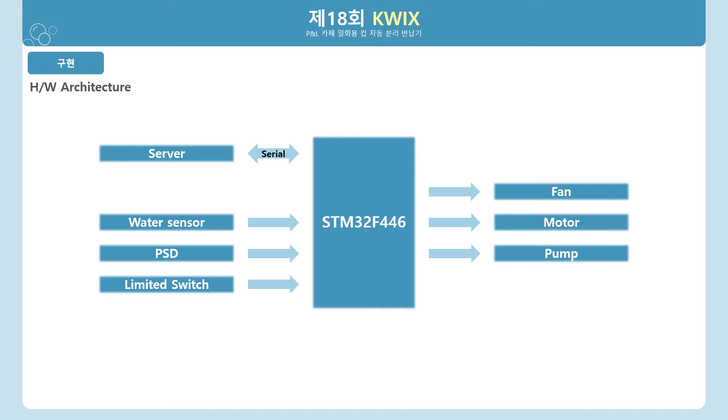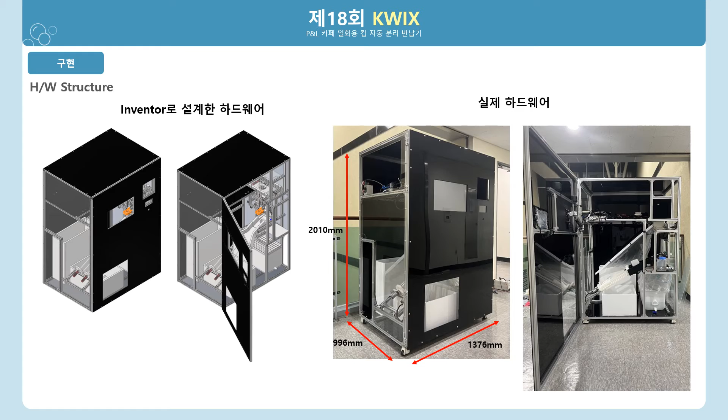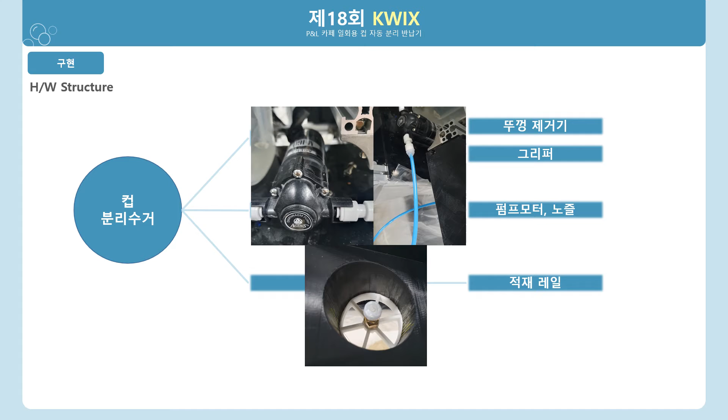These are images designed with Inventor tool and pictures of our work. In order to carry out the proper separate collection, first of all, the cup and cup lid are separated using a cup lid remover and gripper made with a 3D printer. Second, the cup is washed through the pump motor and nozzle made by ourselves. Then we made a mechanism for loading and storing cups by making a sorting rail and loading rail.

Our machine takes 24 seconds to separate and collect one cup, and the total weight of the machine is 150 kilograms, and it can load and store about 600 cups. Available cup size ranges from 10 to 20 ounces for paper cups and 12 to 24 ounces for plastic cups, and available straw lengths are up to 210 millimeters.

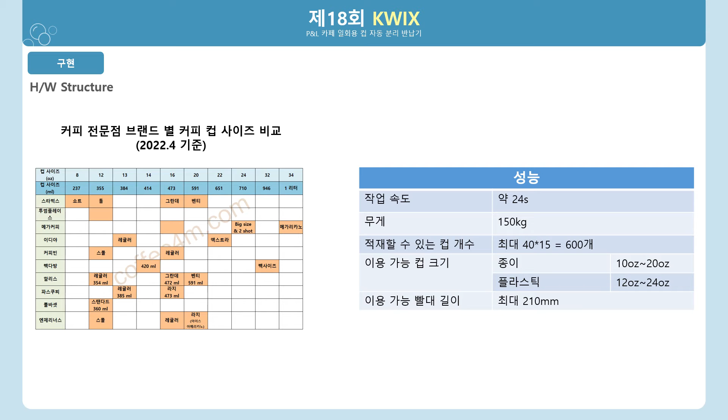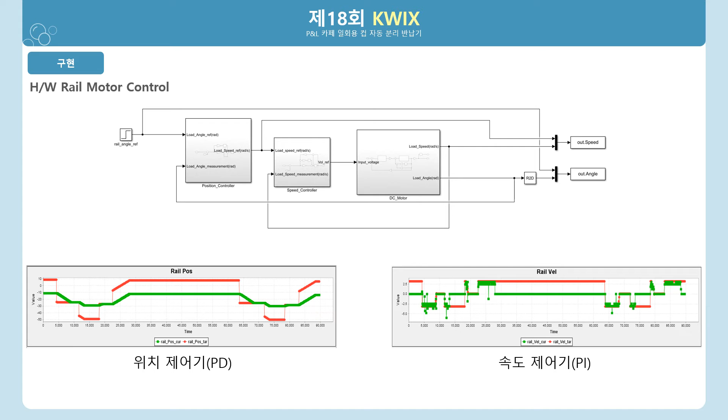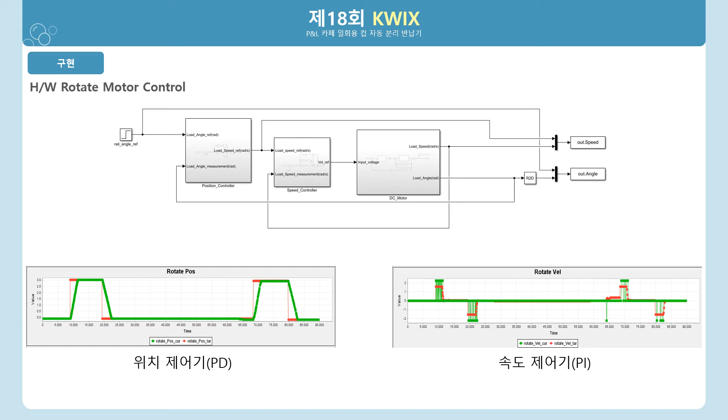We use a position controller using PD control and a speed controller using PI control to control the rail motor that moves the gripper. Position controller and speed controller were also used to control the wrist rotation motor that rotates the gripper.